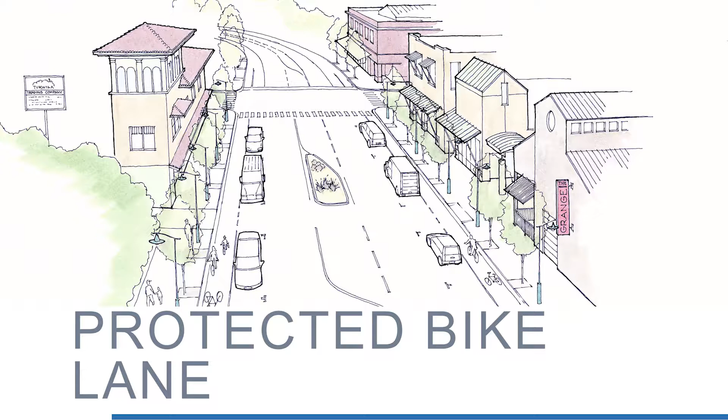So to get to that investment, the single most important thing is changing the character of the street itself. Right now you have an overly fast 5-lane road, really a former highway until you took control of it again. So the most important first step is to change it from 5 lanes of auto-only to thinking about the cyclist, the pedestrians, and the businesses, making it act like civic infrastructure rather than just having a single purpose, which is to move cars.

We've been talking to all of your transit partners about multimodal solutions. Even if you take it from 5 travel lanes to 3, we're adding 2 new bike lanes and on-street parking that supports retail. So instead of being a one-problem solution, it becomes a multi-problem solution. It really can become a place-making solution.

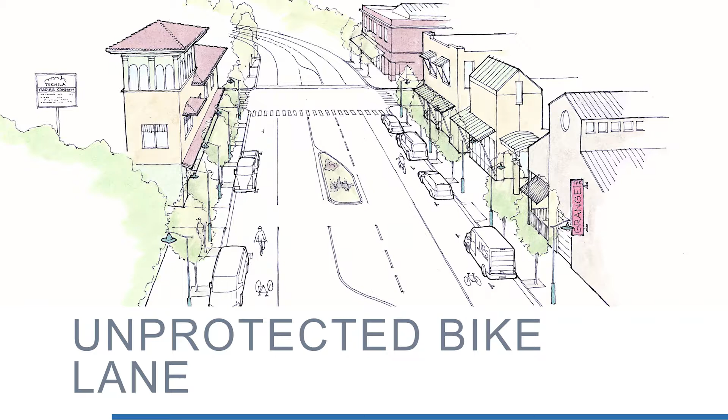So there's a couple of options that Paul has developed with his team. The first is protected bike lanes between the sidewalk and the parked cars. The other would be an unprotected bike lane painted on the outside of the parked cars. There's lots of different conditions in which one would be slightly better than the other, but it's basically the same striping. Your public works and engineering will be working on which of those solutions is most appropriate where. The next thing you told us very clearly was protect our cultural diversity.

It's our largest asset. Andrew and his team worked really carefully to start looking at the uses that are already amazing assets, but aren't known to anyone except locals. So it's not building a tremendous amount of economic benefit to the community as a whole and to the city, because it's kind of unseen. Who would know that in the basement of this building is an African bazaar? Who would know that the best tea shop in town has no sign? So it's about how do you begin to daylight those things.

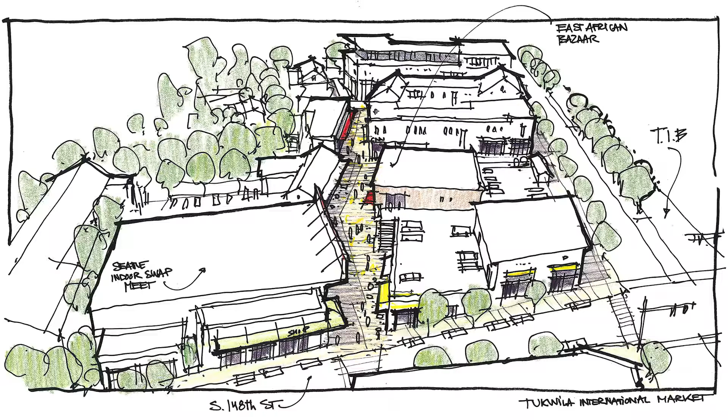The fascinating thing about it is Andrew looked for precedent - well, we'll get to that in just a moment. This is how it would look from an aerial, so you see the existing buildings are preserved. It's a very economically gentle process because you can infill it with small buildings. It can be done very affordably.

And the fascinating thing is it's not really about the building, it's about the activity in front of the buildings that make it so special.

This is a plan for what that might look like. It calls out the swap meet, the bazaar, the existing Tukwila Neighborhood Center, right here, with courtyard buildings and new buildings that create interior courts, and a new little L-shaped street that gives you more frontages. When you have these very large blocks without smaller streets creating a grid, there aren't as many opportunities for businesses and residential.

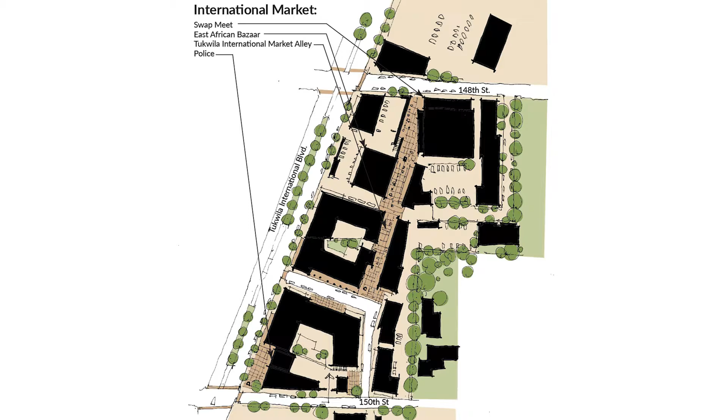So as you begin to break those blocks down, you get more development potential. And then the pedestrian alley, even though it's fairly linear in nature because the buildings are offset, it creates that really kind of funky, organic, maybe even European sort of shopping street.

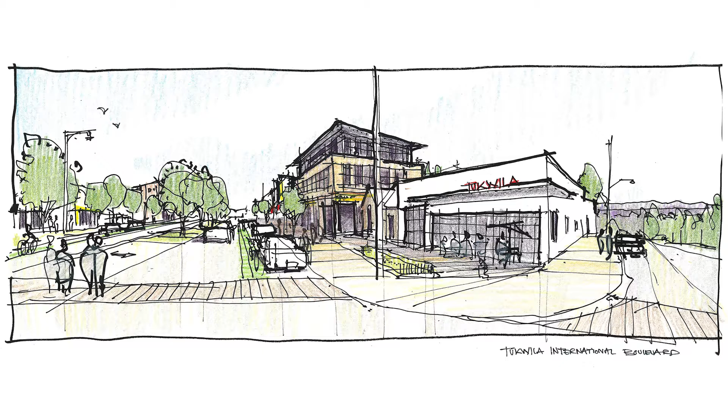With this canted area, it's an ideal location for a sidewalk cafe, coffee shop, or any use that might enjoy sidewalk seating. Andrew has transformed the fairly opaque frontage with windows, creating transparency and eyes on the street—all the things that make a neighborhood vibrant. Behind that, you can see infill with a 3-story building that could be residential or office over retail.

The other great thing about this illustration is it shows the reconfiguration of the street. In this instance, it's a painted bike lane outside of the parking—these could easily be reversed—with one travel lane in each direction and a lane in the middle for turning or a median, as you have now. The one thing about this solution Paul proposed is it doesn't move the curbs, so it's a very affordable way to change the street environment. It's done only with paint, so it's incredibly affordable. It's when you move the curbs that things become quite expensive.

Another thing you told us was to improve the safety of the station. The kids who participated the first night talked about their sense of trepidation when at the station in the evening. The empty parking lot is fearful, even though there's lots of collaboration between the city, transit, and policing—it can still feel intimidating. So you told us to improve the station and pedestrian safety in general.

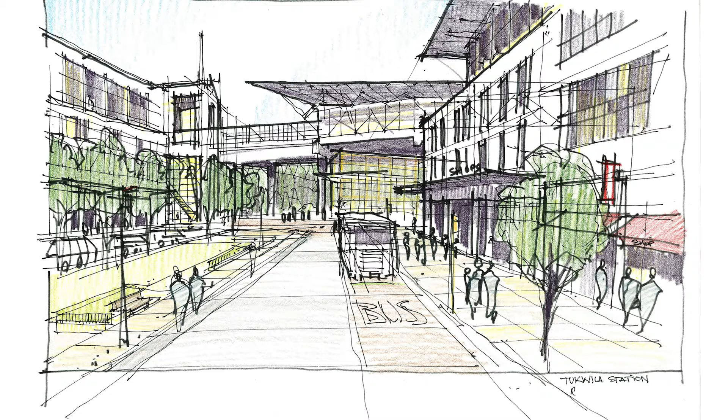Because of that, Andrew and Fick looked at what might be done to improve this situation. Right now it's a very large, heavily used parking lot and station, but it's a single-use destination, and in the evening it can have some questionable activity. So the thought that occurred to Andrew is, let's do what many other stations in Seattle have done: create a TOD with structured parking, and then residential over retail or services, so you have eyes on the street and on the public realm 24/7—one of the best ways to mitigate crime.

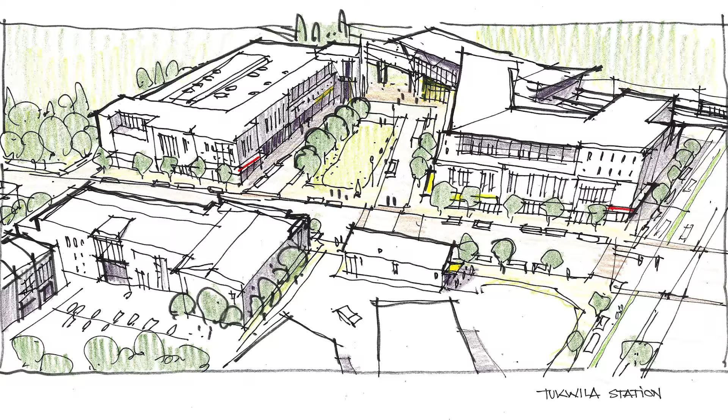What Andrew's showing here is a transit plaza where buses can loop around right in front of the station, with vertical mixed use on both sides wrapping a parking deck. Here's what that would look like from an aerial view, so you can see it better—the deck with the residential wrapper, the transfer plaza, and another mixed use building to the west. He's also showing infill along the edge of Southcenter on the north with the remaining surface parking behind.

The interesting thing in talking to transit is they said it was a very compelling idea. Since they own the property, it's a potential for them to consider redevelopment. It's a long-term plan, but they were very supportive of the idea, which was encouraging. So this is what the plan would look like.

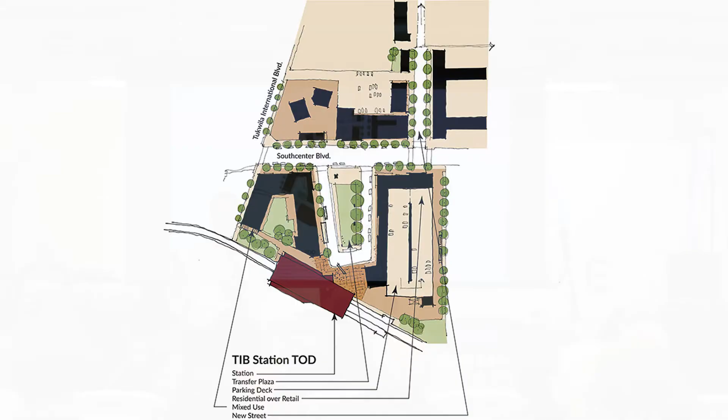Here's the plaza, the station, and the two wrappers. What it's showing is the potential to cut through to the north, and this is one of the ways you might begin to break down your block structure. Anytime large-scale development happens, you could ask for connectivity, and because you're giving additional development potential, it becomes an asset to both the private sector and the public sector.

So how do we get it done? I mean, those are some beautiful plans, right? It was funny—at one of our focus group meetings on transportation, I was showing some pictures, and a participant in the crowd said, 'Well, it's easy to draw a drawing.' Well, it's not so easy to draw a drawing, but it is harder to get it done.

So there are some simple steps, basically three. The first one, the mayor said, could be done within a year—if all goes well, it could at least be started in 2017—and that's restriping. That really is the catalytic project that incentivizes almost everything else.

The second one is code amendments. Right now there are multiple zoning designations along the corridor, and you can achieve a whole lot—you guys are really good at development agreements. But the interesting thing about development agreements is they're a little unpredictable. You're all very good at making those successful, but for an investor to know ahead of time what the potential is on a site, that's a huge incentive for them to commit to a project here.

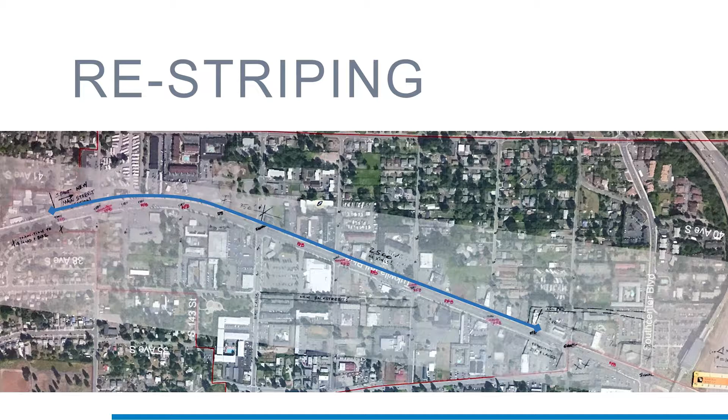Additionally, he's making some recommendations - if this is the restriping, how do you begin and end it? How do the bike lanes feed into your existing bicycle network so that there are ways to get on and off of the boulevard? All of that is being worked out with engineering.

The second thing is the code changes, and Lynn Richards, the CEO of CNU, has been working very diligently on how you can do this incrementally. She put these slides together for us, and I feel very honored to have had her actively participating.

The one thing about code changes that you guys have already been working on, which is really impressive, is what are the usual barriers to code reform? Number one, if it's a massive project, a total rezoning, it's expensive and complicated. You start to look at non-conforming uses, public engagement issues. It requires usually a lot of time, a lot of political will, and almost uniform public buy-in - those are really difficult hurdles normally to code reform.

Now I want to talk a little bit about transitions. This is from a Phoenix code, so the heights are all wrong, but we're working on recommendations, using your sun angles, for how you transition from the corridor to the single-family neighborhoods. You can do it a number of different ways, through sun angles and step backs, or through building type.

Lori Volk, who is doing the housing study, found there's a very large demand for fee-simple or ownership townhouses that is underserved here in Tukwila. If you do even a 3-story townhouse with tuck-under parking, that 3-story transition to the single-family residential is a very good neighbor that protects people from solar shadows, and it's a like use—medium density residential across from low density residential. So instead of sun angles, we may use something like building types to build in your transition zones.

Lynn's point is that the neighborhood center and the Main Street center, in form and intensity, are very much the same thing. It's just the fabric in which it's embedded that makes it a different place. And if you multiply these, you wind up with a downtown or an urban center. You guys have already built the regulations that are critical to your urban center.

For us to extrude that and take the applicable form to your Main Street, it's an almost seamless transition. It's not that it's going to be without effort—I'm sorry if I'm making it sound like a no-brainer, your staff's going to shoot me for that—but you have done the hard work already that's going to make it a much easier process than it normally is.

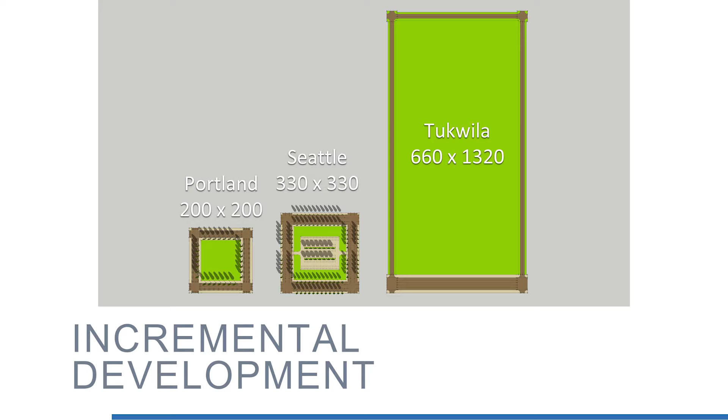And then the average Tukwila block, which is 660 by 1320. So your single block is 2 blocks wide and 4 blocks deep relative to Seattle. What this means is you have a whole lot of land you haven't developed yet. That's a good thing, you have room to grow, but you can't get to that land until you build some streets. So that's the hard part, that's the big issue.

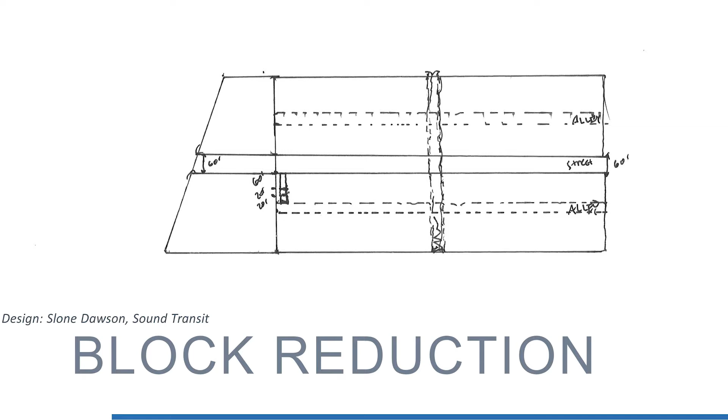Slone Dawson from Sound Transit, who was here at one of our meetings, did a sketch for us randomly at the table looking at the map, about how your 660 block, if you subdivide it with a 60-foot right-of-way, which is actually a little big, you get two 300-foot blocks on either side with an alley behind. That's the perfect depth for townhouses, which is your missing middle. It's basically the middle density housing type that you don't have much of right now, and what you have is very successful. So your geometry is in place, it's just a matter of dividing it up in a rational manner.

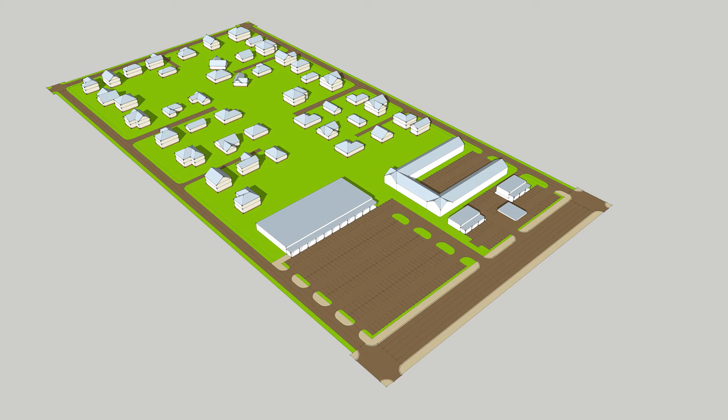Steve did a number of these illustrations, which you can see in more detail on the wall, showing how you can develop incrementally. Because you're not going to get a lot of big projects immediately - you know how long it took for Tukwila Village, that's a big deal. So what do you do with your parking lots in the meantime?

Well, the first step is super simple, you probably didn't even see that happen. But it's just a little plaza and a tree and a food truck on the corner. It begins to create energy, it draws people, and it starts to activate the street. It's essentially what Portland has done with all of their downtown parking lots.

So the next thing you do is you line the whole frontage. And then all of a sudden from the street, even though they're tiny little pods, it becomes an active frontage.

And right now you already have a demand. Your high school kids filled out a survey of what they wanted to see on TIB, and one of the things they said is the opportunity for entrepreneurial small restaurants. You already have a really great collection - we've had some of the best food ever this week, eating all of your wonderful cultural options here in town. So food trucks should be a no-brainer.

So this is how it might look from the street with the apartments behind and the Justice Center in the front, and then looking at it from the apartments back toward the Justice Center. So Steve did some great models just to show that from an urban perspective the Justice Center actually could be a very good neighbor.

So I just want to remind you, this is my last slide before I turn it over to Maura. I want to remind you about CNU, it's coming up May 3 through 6. Thank you, Mayor, for mentioning that in the beginning. This report will be delivered to the city at that point in time. There will be a wonderful ceremony, and there will be opportunity for discussion. We'd love it if you came. And it's more than just the Tukwila report, although that's critically important. You guys are so far ahead of the curve on your understanding of urbanity and what city building is all about, so I think you would find the CNU in general to be a tremendous resource. There are lots of sessions on cultural diversity, on suburban poverty, on some of the things you're already working very hard on, and you have council people that will be participating. We really strongly encourage you to come. We're very grateful to be in your region and really look forward to coming back for that.